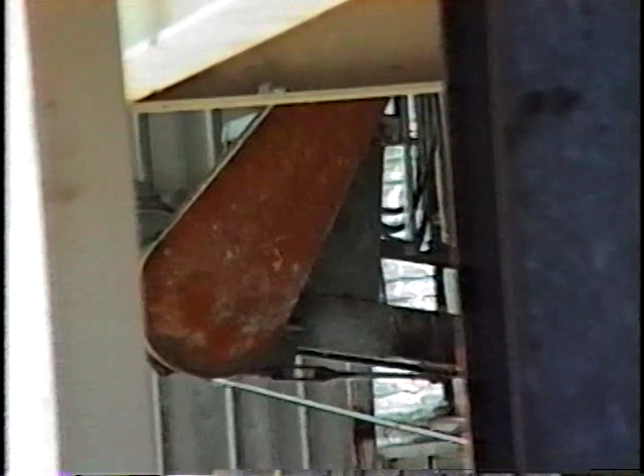This will transport the sludge, which you can see barely in the distance there. That sludge will eventually drop on this conveyor and be transported up by means of this conveyor, across and over, and drop into the JC Steel feeder.

As we look down into the feeder, we can see it is equipped with a live bottom multiple screw arrangement. There are 4 separate individual screws that transport the material across and under the cross screw. This is the JC Steel screw feeder, which will screw the sludge from number 3 conveyor into the Model 360 impact dryer mill.

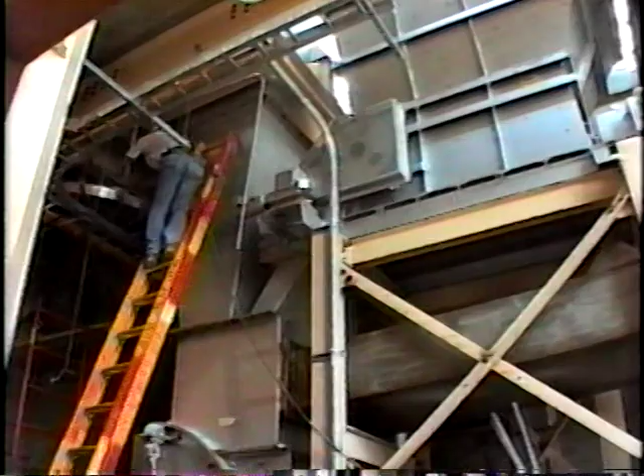This is a 200 horsepower motor that drives this mill with a 4 sheave pulley on here. The hot gases come in right there in the duct where the braces cross, and the sludge comes in on the very top of the mill and mixes with the hot air.

The dried sludge comes out through the back duct and goes up to the cyclone, to the velocity separator. This is the velocity separator right below us from the Model 360 impact dryer mill, which is on the ground floor. The dried sludge and hot air come up through this separator, and the gas come through here and go to the cyclone separator.

Inside this cyclone separator, the dried sludge is separated from the gas. The dried sludge falls to the bottom of this separator and goes through the rotary valve down there on the floor. From the rotary valve, the dried sludge goes to the Meteor dryer mill, gets dried one more time with drying air, and then goes to the sludge combustor.

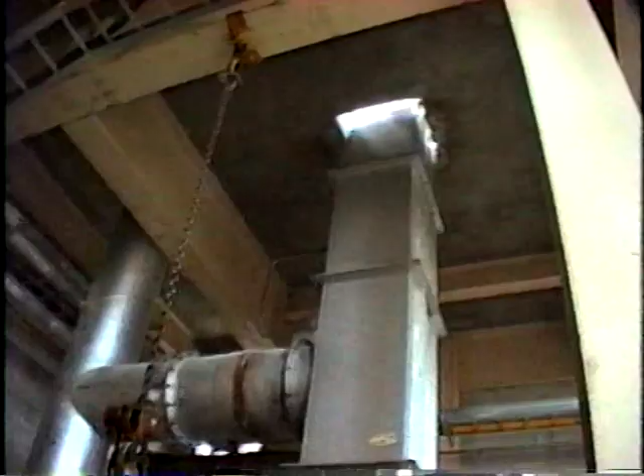This is the downpipe that is directly below the cyclone rotary valve. So the primary sludge that has been ground now drops into this pipe.

The dried sludge from the cyclone separator comes through here and into the Meteor hammer mill. It gets dried again with the drying air that comes in through the line here with the sludge.

This is a bypass in the back. We can either run the air through the sludge to dry it, or we can bypass the air back there around the mill and through this fan, which is over here.

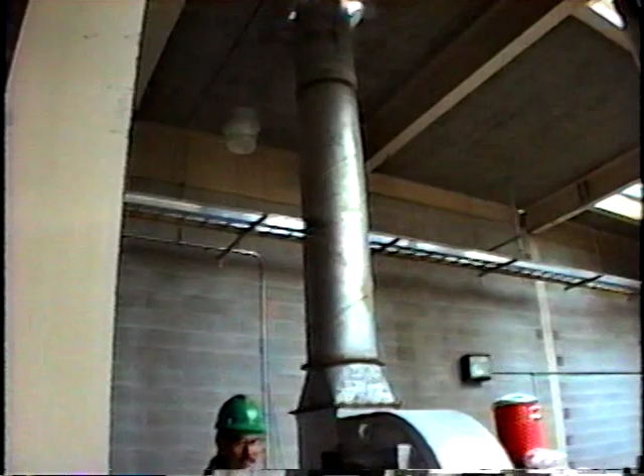This fan is the one that conveys the dried sludge and air up to the sludge combustor, fan evacuating the Meteor mill. So now the air and fuel are transported up this line and enter the Coen burner.

Those are all inputs on that sheet? These are all inputs. Show me where the inputs are in the cabin. Inputs are located on the top rack, inside.

The first input is pulverizer start. The second input is okay to turn on and engage eddy current clutch.

Are those in the same order as shown on that sheet? Correct. They're all labeled here, saying exactly what they are and what they do. How many inputs do you have? We have 14 inputs.

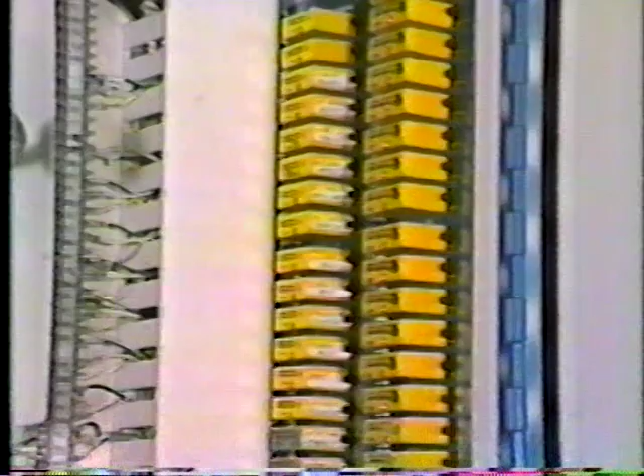Some of these inputs, when they're engaged or off — point to one that's on, please. The first one that is on is spinner over temp. That means we have a normally closed switch coming into this input.

If this light would be off, that would mean we have an over temp indication, which would fire an alarm on the CRT in the main control room.

What's the one above it? The one above it is the ECC cooling system pressure switch, which is a normally closed switch. When we have pressure, the switch opens. If not, we fire an alarm and shut down the entire system.

You would not have any water flow to your clutch.

Sheet 102D9956, page 5 of 11. Okay, we skipped one sheet, is that correct? Correct. That sheet showed the rest of our inputs, the following inputs.

Alright, now what do we got here? This sheet shows some of our outputs. These are our output modules for the computer.

Coming out of the output module on some of the outputs, we have indicators and/or relays, which fire the according output to a motor starter and indicate with an indicator on the local panel.

All of these then are your outputs. Would you please point to your outputs? Our outputs are two lower racks, which are black. Our outputs start with number 1 being on the bottom inside rack.

Those go from 0 to 15, and then 16 through 31 is on the second rack. All of these outputs are fused, a little 5 amp fuse, which is located above each output module.

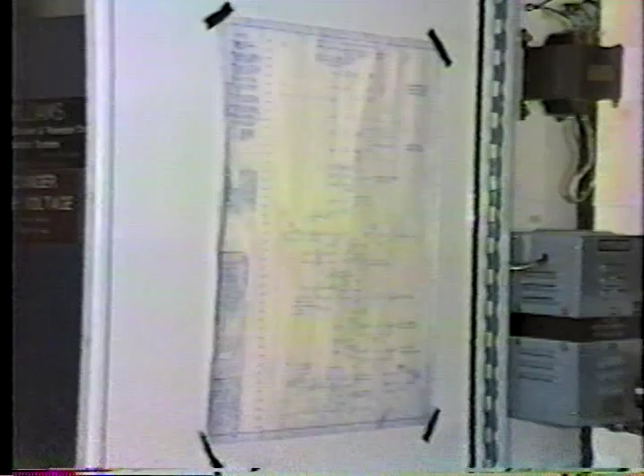This is electrical drawing 102D9956, page 10 of 11. And this drawing covers completely the eddy current clutch drive. Would you please point to that? And the cooling system, which is located on the clutch itself.

Alright, can we discuss in detail some of the functions that are available to us. The first thing we have in the upper left-hand corner says accelerate. What should that be set at? Right now we have it set for 80%.

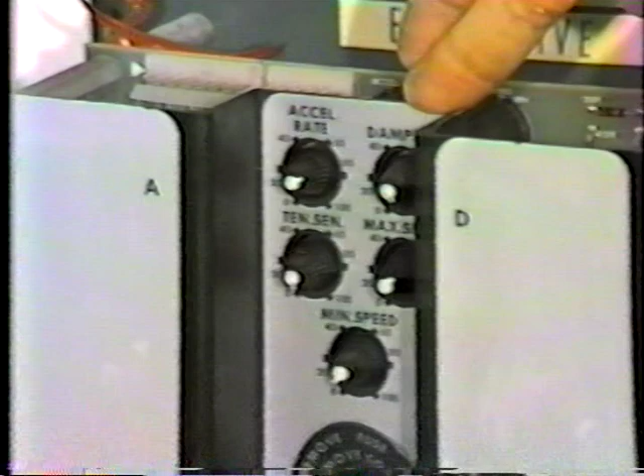What this pot does is give us a ramping feature once we've given it a 4 to 20 milliamp signal of how fast we want this drive to start under load. The next pot, on the top right, is our dampening. This helps to dampen out any fluctuations in current signal coming to the drive. What's it set at? This is set at 100%.

The next one is our tension sensitivity, which on this drive we're not using. We have it set at 0.

The next pot is our max speed for manual. What's that set at? We are set at 80%. You want to change the maximum speed of the drive in manual, this would be the pot you'd have to change.

Does that pot actually override in automatic also? On this drive, no, it does not. It's only manual.

The center pot on the bottom is our minimum speed for manual. For manual setting, that's set at 0 speed, so at minimum speed you would not be rotating. It could actually come down to 0, but you could prevent it from coming to 0 by changing that set point. Correct, only in manual mode.

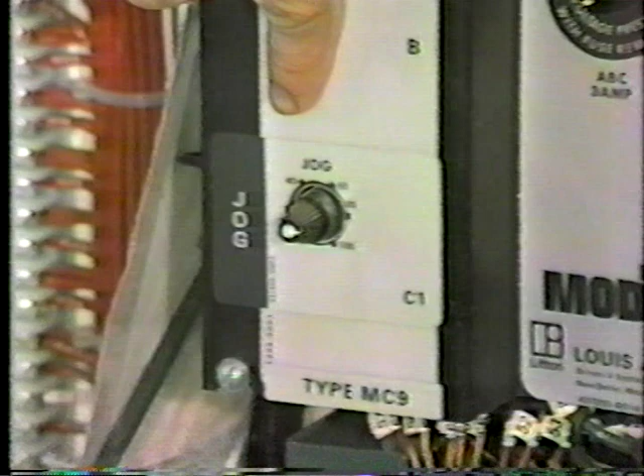Next one would be our jog. We can jog the eddy current clutch 0 to 40% speed of the motor. What's it now set at? We are set at 100%, so we can jog the pulverizer at 40% speed.

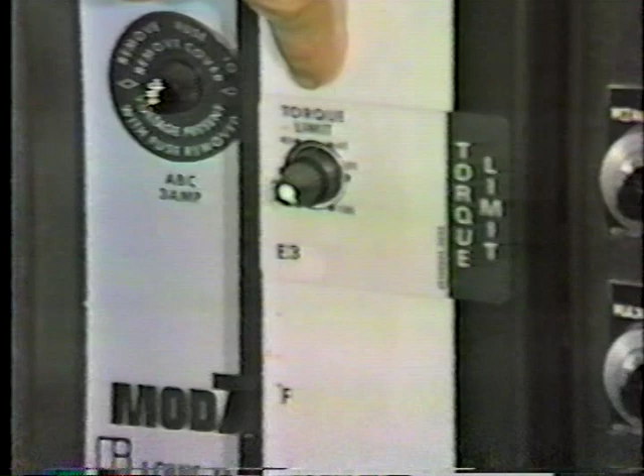We also have a torque limit, which limits the maximum amount of current the pulverizer would handle. It would cause a slipping in the clutch. After we get going, we can set that so in case there's a jam up inside the mill, the torque limiter will allow the mill to slip.

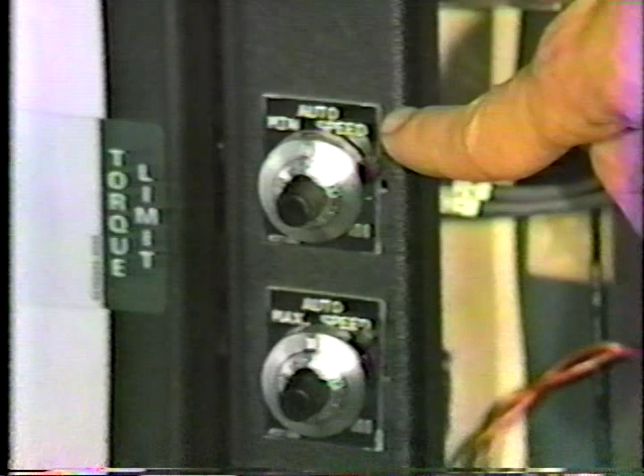Next we have our automatic minimum speed setting. This sets our minimum speed for our current follower circuit on the drive. What's it currently set at? This is set at 0 speed, so you can come all the way down to 0 if you want to, in automatic.

Next one is our automatic maximum speed. That can be set for any value that we want to limit the upper range of the mill in automatic. So that a 20 milliamp signal from the boiler will represent the maximum output that Foster Wheeler wishes for that particular set of burners. That will be adjusted accordingly.

Our bottom pot is a zero bias pot. This helps to stabilize the interaction between the two automatic speed pots. What's it set at right now? It is set at 6.10.

Here we have a Westinghouse 200 horsepower, 1800 RPM motor.

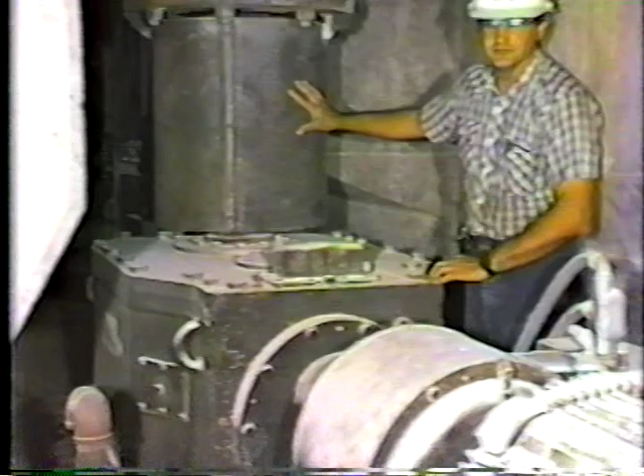This is drawing 102D9956, sheet 11 of 11. This drawing covers in its entirety the spinner classifier drive.

Drawing covers the spinner classifier drive in its entirety, which is a DC drive. Drive is located right here, on this small sub-panel.

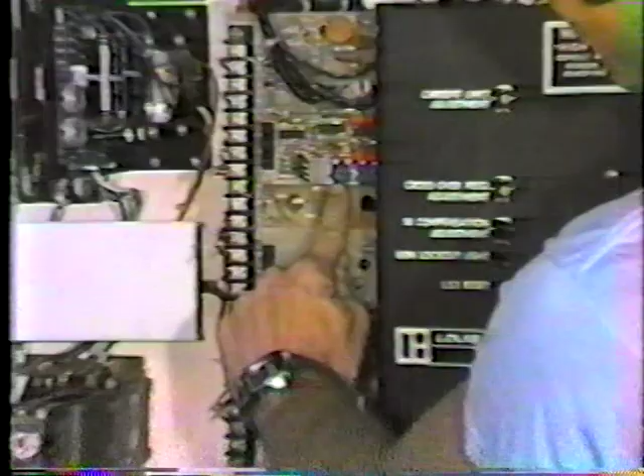To adjust this drive, we have an accel pot, which limits the speed ramp when you give a current signal to the drive on how fast you want the drive to move.

The accel, a decel, sets how fast you want the drive to stop.

Over here we set our jog, which we don't use, do not use. We have a minimum speed pot, which we won't use, we would never use.

Then we have our maximum speed pot, how fast we would want the drive to rotate. That's set maximum.

Stability is similar to your minimum speed in automatic. Response is similar to your maximum speed in automatic.

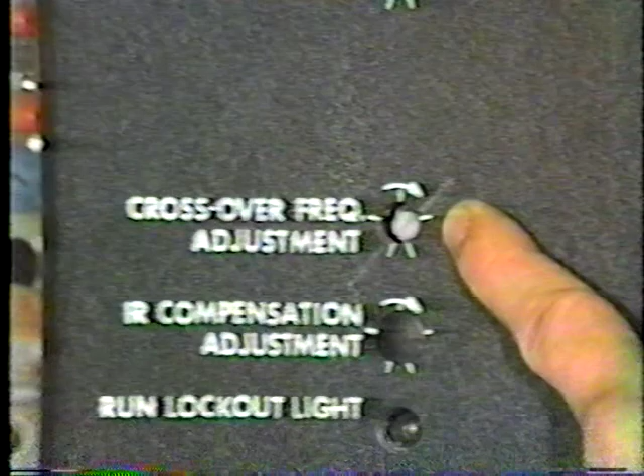This is the crossover frequency adjustment. You adjust the frequency of the drive firing the SCRs. I noticed that's been marked. Yes, it has. This is a factory adjustment.

You then have an IR compensation, which is sealed by the factory. It's not to be fooled with.

If you ever have problems with the drive, you will get a run lockout light that comes on if there's a problem. If you get this light, you need to reset the drive. There's a small reset button you have to press.

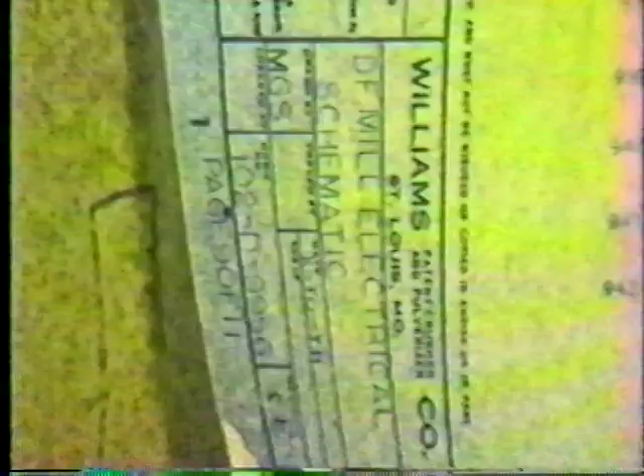This drawing covers all the pulverizer speed meter, spinner speed meter, pulverizer current meter, and spinner current meter. We have our signal conditioners taking a 0 to 40 volt signal converted to a 4 to 20 milliamp signal for the computer to read, for each of the 4 signals.

Supervisors have the key, only the supervisors have the key. They have to go in the manual. Then through these direct pots, you can set the various functions of the machinery.

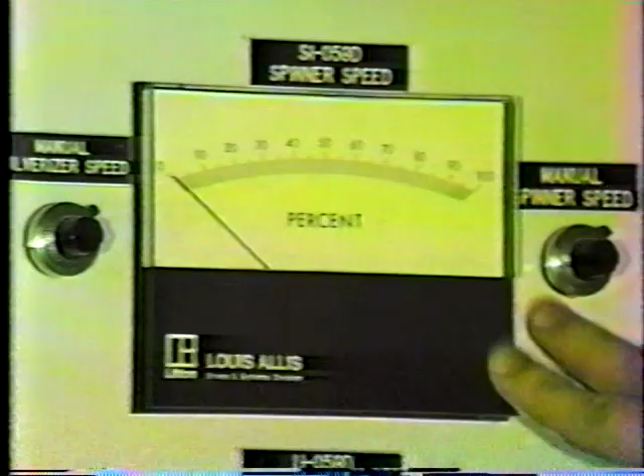We have our spinner speed, which is 0 to 100%, in percent, and the spinner amp, same as the mill. We also have a spinner manual speed pot.

Our differential pressure gauge. This is not in percent. This is actual inches of static pressure across the machine, across the pulverizer.

We have two set points. The lower set point being low DP. That gives an indication that the mill is empty.

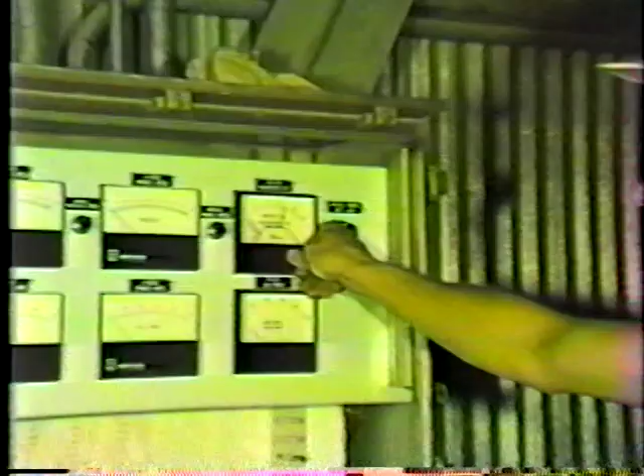The upper set point is a hard limit on feed rate to the mill. For some reason, if the computer starts overfeeding, we can cut the signal to the feeder. So the upper one is an override on the computer and will actually shut off the feeder should something go awry.

The bottom one is our lower hard contact limit telling us that we are empty. Built into the computer circuit is the ability for the computer to tell us that we are 1 inch below our ideal set point. This is another hard contact that we can manually set that will tell us the same thing, and during shutdown they will have notification that we've run out of coal, ground the coal out of the system, and the system can shut down.

The meter below is air CFM in the system, percent air that is flowing through the system. This is a Foster Wheeler feedback, and is only displayed on our board.

We also have a control on-off, power on-off, that is a key switch. Once it's turned off, the only reason it should ever be turned off is if somebody is working on the system. So you've got an on-off power control for this cabinet.

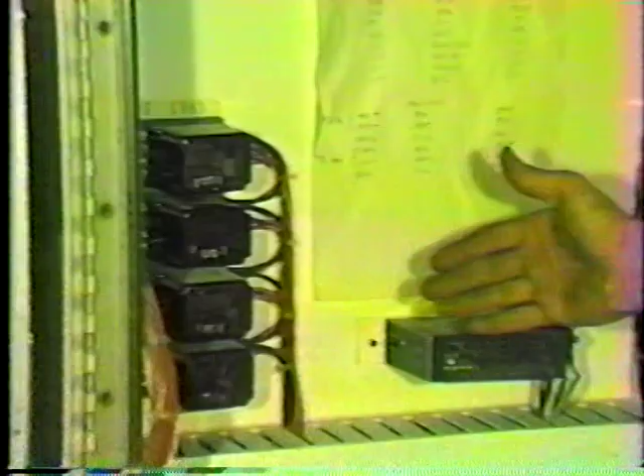These are all our signal conditioning modules, which condition the signals from the meters into the computer. These are the signals that go to the computer.

This power supply feeds the current signal through the Delta P transmitter, power supply for the Delta P transmitter. That's all that's in this cabinet.

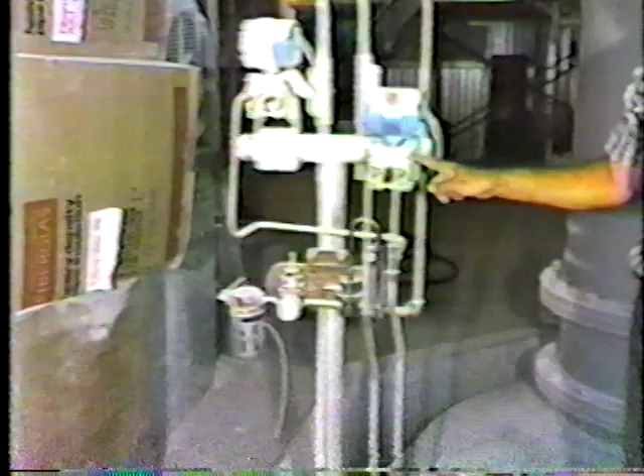This is the lower pressure side. It comes over to the pressure transmitter, which then sends a 4 to 20 milliamp signal to the computer. The computer, based upon mill speed, computes a differential pressure that we should be operating, and in turn generates a signal to the Merrick feeder.

This is a Trabon automatic journal lubrication system. Under normal cycle, we'll have a green light. When the lube makes a cycle and turns on, we will get an amber light. If for any reason the lubrication would not lubricate, we would then get a red bulb light. Okay, open the cabinet door.

Inside of the panel here, we have two means of operating the lube cycle. One, we can press this button here for a manual lube. All right, we'll do that. It will operate the barrel pump. When we press the button, we went from a green light to...

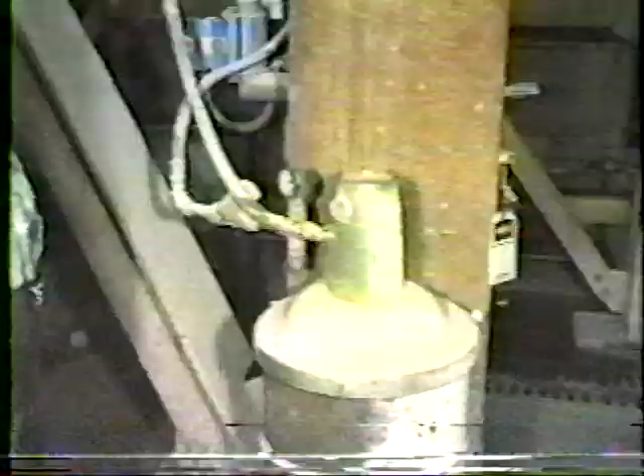This inputs the solenoid to the Trabon barrel pump, which now pumps lubricant out of this barrel. What's in that barrel? It has a lubricant, Mobiltemp 78. That's a high temperature lithium-based grease.

Now that pumps the grease from there, where? It comes out through this fitting, to a high pressure indicator which we're operating at about 1,000 to 1,500 pounds per square inch.

If we get an overpressure in the line, a blockage, rather than rupture a line downstream, we have a rupture disc here that is set to relieve the pressure at about 2,000 psi.

Where's the grease then go? The grease then comes on through this filter, goes out through the line to this distribution block.

Here is the cycle switch. Whenever the lube unit goes through a cycle, it has to make this switch to know that we have completed our lubrication cycle.

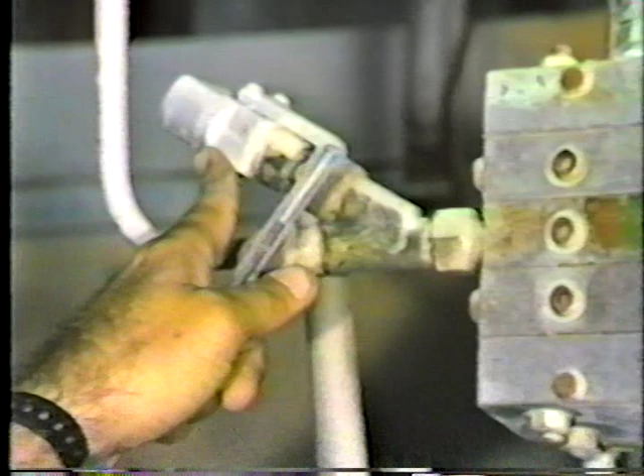It comes down through the block, it splits, and we have one line that goes on through a broken line indicator. What happens there if you've got a broken line? We get an indication, we get a drop in pressure, and an actuation of this switch, knowing that we do not have back pressure on this line, which gives us a fault indicator.

This line goes off to the inside of the pulverizer to lubricate the journals and the top mill bearing. You got another one? This line here goes off and goes to the bottom of the pulverizer and lubricates the bottom mill bearing.

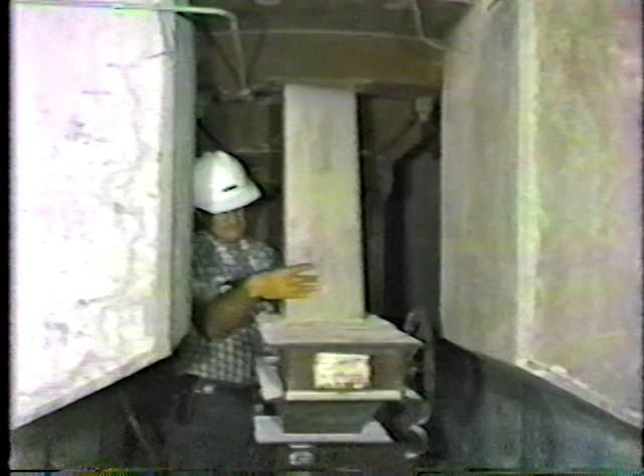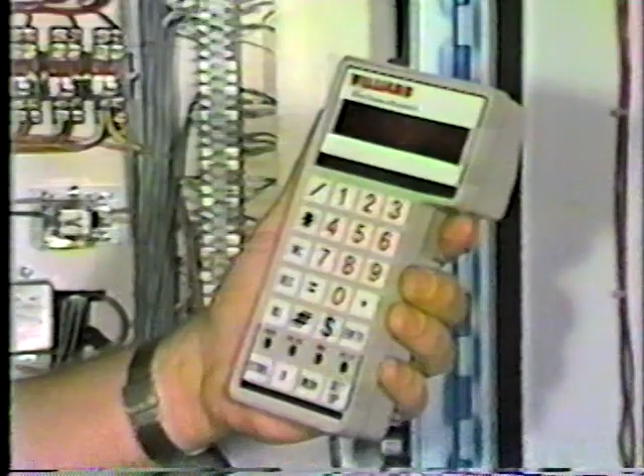Okay, I'm going to zoom down on that. Would you explain a little something about the terminal for us? This is the handheld terminal for entering the parameters which operate the mill. The terminal has an LED display.

Okay, hold on right there. I'm going to turn off the lights so maybe we can see the LED display. Would you hold it up straight at me now? Okay, this is the normal display. Cock it just a little bit, I'm getting a light glare. There it is, what does that say?

It says Williams DF mill. There it is, Williams DF mill. After powering up the computer or resetting the computer, this is the display you will see. You may also notice that after about 3 seconds it blinks. This is part of the self-check of the computer when it turns on.

Could you show me that? All right, the keyboard has a numeric keypad, number 0 and 1 through 9. Several of the keys we don't use, but the very important ones, first of all, the mode of operation. To set up the parameters of the mill, we push setup.

Okay, let's start about what are these setup parameters. There's a double EEPROM that allows you to set variables inside the computer. Is that correct? That is correct. Okay, so now we're going to take a look at the first variable. Is that correct? That's right.

All right, the first variable in the setup, variable number 1, is the minimum operating mill speed. All right, and you can see that it's set for 60% of scale. That can be changed by pushing the increase button or lowered by pushing the decrease button.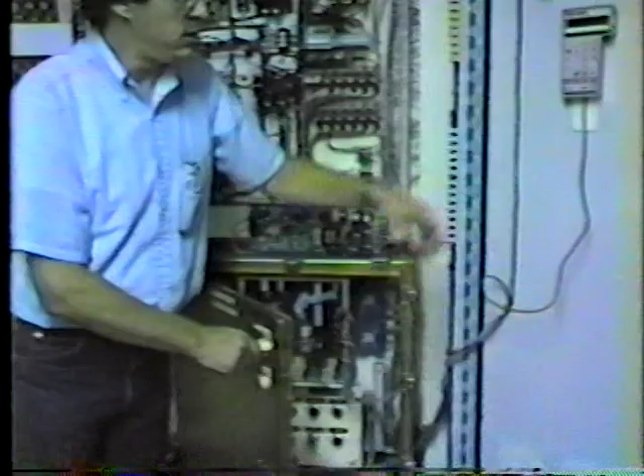The light above the B button should come on, and the mill will not operate. Turn it on, please. Now you can see that we've got the bit failure light. We should also point out that we did not get pulverizer ready to start.

Now you cannot go forward any further, is that correct? That is correct. We have to go to the handheld terminal and see what failed. Would you do built-in test? That is done at location 99.

We have to go to the setup mode. We go to 99, and we see that it's... 102. Show it directly at me, please.

That says that you got a failure at 102. And we look up in the documentation and find out that it's a failure of the analog to digital converter. Okay, having found that and reset the board...

Reset the board, turn the power off first. And we fixed the problem, but even fixing the problem, when we turn the computer power back on, we're still going to get the failure. We've still got the failure up there.

We have to acknowledge to the computer that we have fixed the problem. That will aid in finding intermittents and things of that sort.

So we're going to go to the setup mode, to channel 99, and to clear that number, we could decrease it, but that takes a while, so we hit the B button. Hit the B button to clear it. That sets it back to 0.

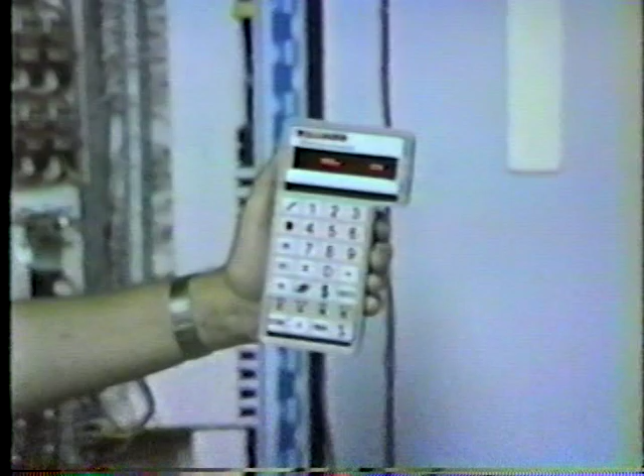Now that's the only way that you can get the pulverizer to start again. You must acknowledge the fact that you had a bit failure in the computer, reset it to 0, and store that value. That is correct.

Are there any other failures like that? Yes, sir. I'll read those off the list to you. Why don't you hold up the list?

Built into the program, when it comes on at power up, it checks the watchdog timer. Show me some of those. The watchdog timer is located on the signal conditioning board.

What does the watchdog timer do? The watchdog timer protects us in case of a computer not failing hard, but going kind of crazy. And if the computer does not, every time through its loop, say 'Hi' to the watchdog timer in about 3 seconds, it will time out and reset the computer, keeping it from going off into space.

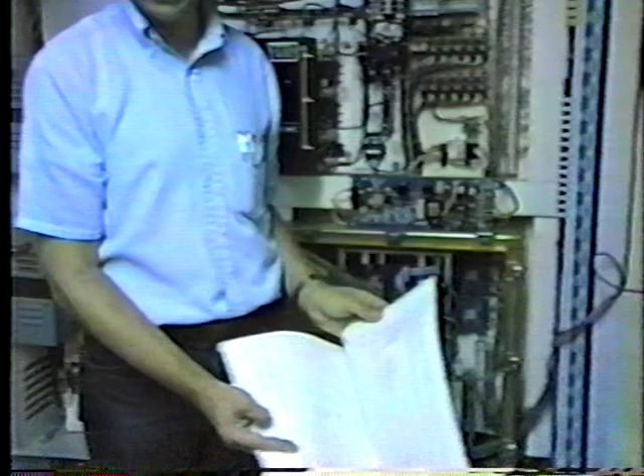That's correct. Besides the watchdog timer, we check the random access memory by writing a pattern out there and reading it back. So in effect, the computer checks itself. If it fails, it's going to notify you how it failed, and you cannot proceed without first clearing the failure. That is correct.

To do that, you have to dial it up under the setup mode, and having done that, clear it by hitting the B button, and then store that information. That's correct. That was the only way you can proceed.

So if this machine ever locks up on you, make sure you come over and look for that bit failure light that's on. That's correct. And if it is, the only way out of it is to acknowledge that failure and reset to 0.

Okay, one other thing, is there a timer on this that would tell you how many hours you've been operational? Yes sir, that's at location 100. Would you show us that? Okay, and right now that shows 0 hours of operation. This would basically tell you how long the machine has been operational.

Every hour, the computer writes to the memory bank, the EEPROM, and updates on the hour, or on any combination of shutdowns it will write directly. Any failure, it will write directly. That is correct, if it's been tripped out by an external trip, and that's normally the Forney flame safety system dropping OK to start or dropping permission to run.

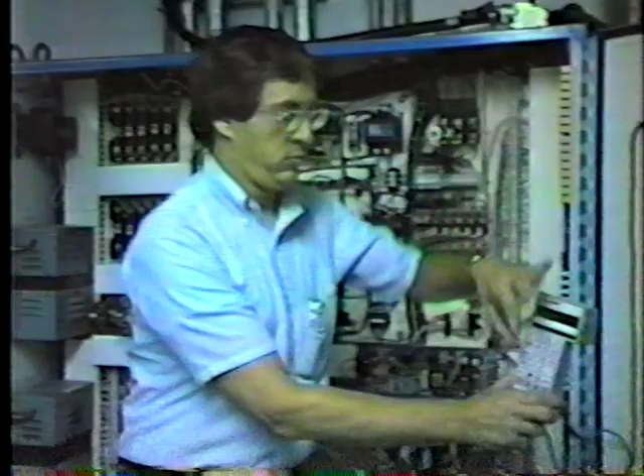Once we've been running, we display on the handheld terminal that we've had an external trip. In other words, you're telling me if, for any reason, we drop off, not due to Williams control, you will notify that there's been an external trip.

That's correct, and that stays until the next trip. So even if we come back up and run, this will stay in the display unless you hit another button of any kind.

Okay, now let's suppose that it's not an external trip and it's a Williams trip. How can you determine what stopped you? Well, if it's been a Williams trip, you'll get the Williams DF mill display again. Okay, give me that. All right, that's the Williams DF mill display.

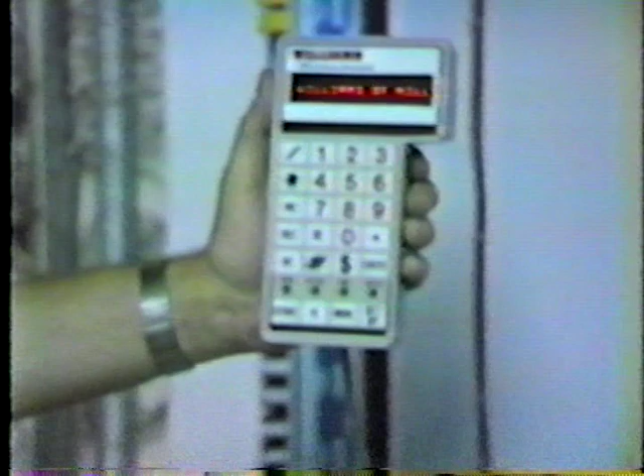That's correct, the unit has tripped. Now how does one go about finding out exactly what tripped it off of the Williams panel? We recognize that Forney will be showing us what tripped, but how could you also see it at the Williams panel? Well, here at the Williams panel, you go over to the output devices, the black solid-state relays, the ones that we looked at before, and they're labeled, and they say things such as spinner start failure, exhauster motor failure.

We have begun a startup, and in 30 seconds we're going to have a failure. What will it be? Should be an exhaust fan failure. Point to it. Right there. And if you look real quickly, that LED actually came on about a half a second before the indication of shutdown started, and shutdown just completed.

Okay, so now that we can walk in here and we can look for the LED that's lighted for a failure on the Williams panel, would you please explain, if we go into the setup mode, would you please push that button? You see the setup light comes on. And now in that mode, would you begin to—I see item number 2, somehow we got up to that.

Would you go back to 1? That's the previously entered item number. Okay, let's go to 1 and enter. Now you see that set for 72.

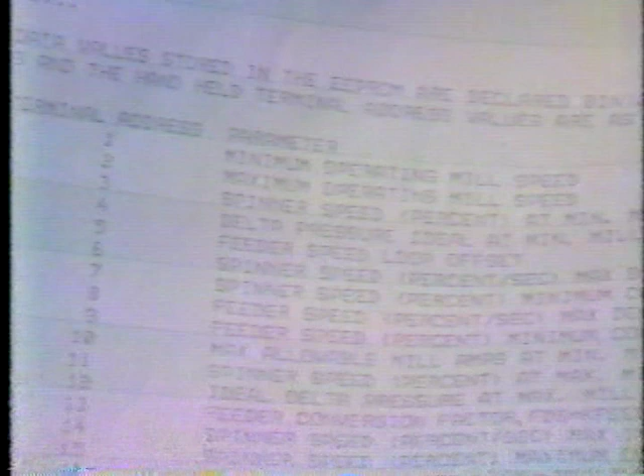Okay, and those values show on there. And item terminal address number 1 says minimum operating mill speed. This is item 2—minimum was first, maximum second. All right, let's take a look at the handheld now.

And so that shows you the value that we set in there, and that's the value that we want to keep in there at all times. The 72% represents the starting position for your roller mill. That's the minimum position, not necessarily the minimum that the roller mill will operate, but the minimum point that we use to reference some of the other parameters we're going to set.

And would you step through that and read off? Now I can step through that merely by pushing setup, and now I'm at number 2, and that, as we indicated, is the maximum operating mill speed, 99%. Okay, and let's stop. We have the terminal in front of us. Item 2 is set at 99.

That's right. Now item 3 is the spinner speed percent at minimum mill speed. Whoops, we got ahead of ourselves. We've done 1 and 2. There's 3. 3 is at 30.

The spinner speed is used to increase or decrease the fineness of the product being burned. Higher percentage gives you finer. So we have set this at 30 and have determined at that setting we get 91 to 92% minus 90 mesh, 200 mesh. The normal is 70 minus 200. So any finer is kind of ridiculous.

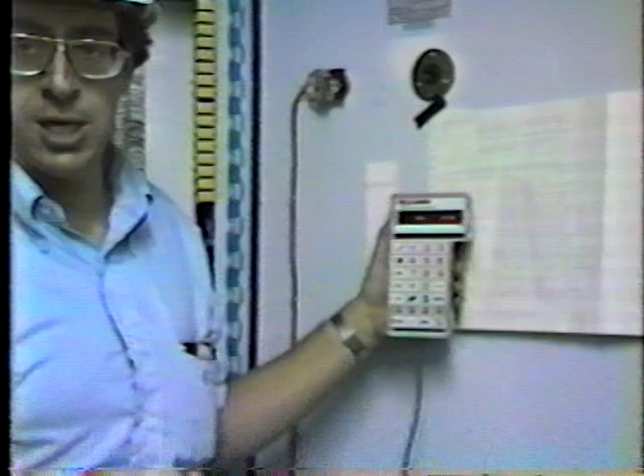Okay, next one. Number 12 is the ideal delta pressure at maximum mill speed. It's set to 67%, which is just a fraction over 2/3 of scale, or 10 inches. That has been set and should not change.

Number 13 is the feeder conversion factor. This is the factor that we calculate boiler demand with, and then we multiply the boiler demand by the linearizing factor of 85%, and that goes out as our feeder command. Okay, that's set at 85. All right, 14.

14 is the spinner speed maximum increase. Up above on number 6, we had the spinner speed maximum decrease. We now have the maximum increase. This is how much we allow the spinner to speed up per second. Okay, that should not be changed, at 5%.

Number 15 is the spinner speed maximum command, and we've allowed for the full range of spinner up to 99%.

Number 16 is the feeder speed maximum increase. This is the amount of topside feeder speed correction that we allow from the target. It's set to 10%.

Number 17 is the feeder speed maximum command. It's set to 99%.

Number 18 is the maximum allowable mill amps at maximum mill speed. We haven't set that, as you noted above, and so that's still set at 99%.

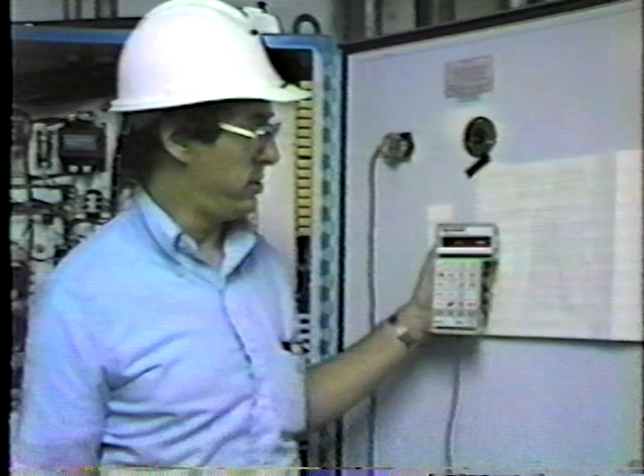Number 21 is the panel alarm timeout value in seconds. This is the time, if you push the DP alarm reset on the local panel out by the pulverizer, that you have to clear up a problem before the alarm will repeat.

22 is the exhaust fan startup delay, set to 30 seconds. This could be reduced if you want to, because apparently your fans are across the line, and it could start in maybe as little as 5 seconds. Allows the program to continue.

23 is the low delta pressure timeout in minutes. This is the time that we will allow the pulverizer to run below, at a certain level below target delta pressure, before we signal the flame safety computer with an alarm.

Correct. Now, there is going to be another factor which indicates that we will not begin counting this time until we're certain delta pressure is below our target. And what number is that? That's number 26. It's called the low delta pressure startup time.

Let's go look at that and then we'll come back. 26 says 30 minutes. We get 30 minutes, and nothing's going to happen for 30 minutes unless somebody does something about the delta pressure being too low.

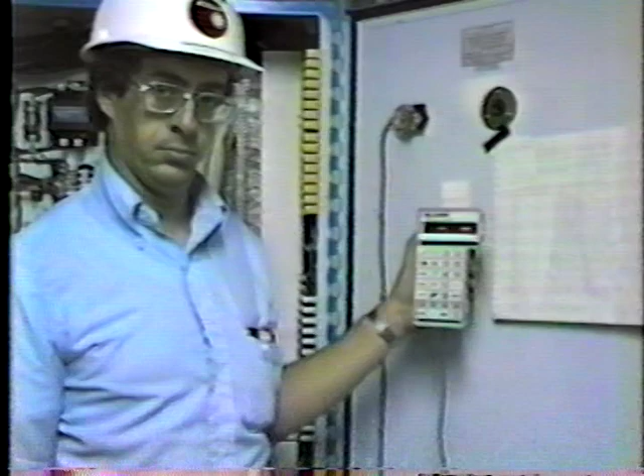Now, that would be an indication if the feeder runs out of material. And that happened today. The material was stuck in the feed chute, clay packed in there, and the low delta pressure shut them down after they ran out of material.

Okay, go back to 24. 24 is the milliamps too high alarm timeout. We had the setting for the milliamps up above. This is the time that we will allow the milliamps to be above that line before we declare the wear alarm.

In either case, we're talking about a non-fatal alarm, it's a warning. So you get 10 minutes? Yes, and this is a debounce type thing. It has to be really proven that it's over.

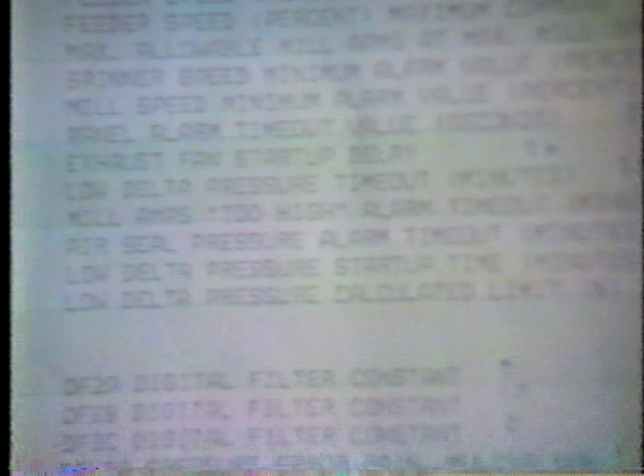25 is the air seal pressure alarm timeout. We allow the air seal pressure to be low for this amount of time, giving a warning alarm before we declare a fatal alarm.

26, we already did, that's the low delta pressure startup time. And 27 is the low delta pressure calculated limit.

Besides having a low delta pressure switch on the delta pressure meter of the local panel, the computer calculates how far delta pressure is running below target delta pressure, and this is the value that it would allow below target. What is that? It shows 0. Shows 80%. I'm going to change that to 20%, because that's where it belongs.

I'm holding the decrease button in and it automatically steps down. When I get to 20, I push store, and that's now locked in the computer. And it should be 20, not 80. That's correct.

All right, now we're down to 27. What's that? Well, we just finished 27. Okay, 28, we don't have anything at 28, and that's signified by the -1. 29, 30, 31, and 32, those are all empty.

They're not currently, I see, 33, 4, 5, 6, 7, and 8. What are those? 33 is 0. Okay, these are digital filtering constants, and they really aren't anything that you should worry about, except we're going to tell you what they are. 33 is 0, 34 is 10, 35 is 0, 36 is what? 1.

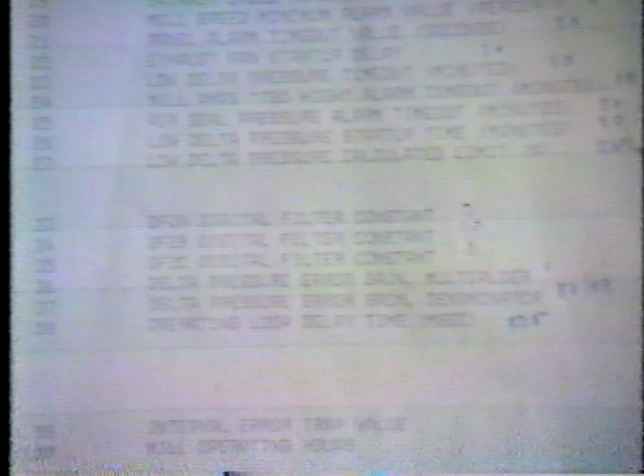37 is 99. And 38, 25. Those are constants that should not be fooled with. Anything else? That's all.

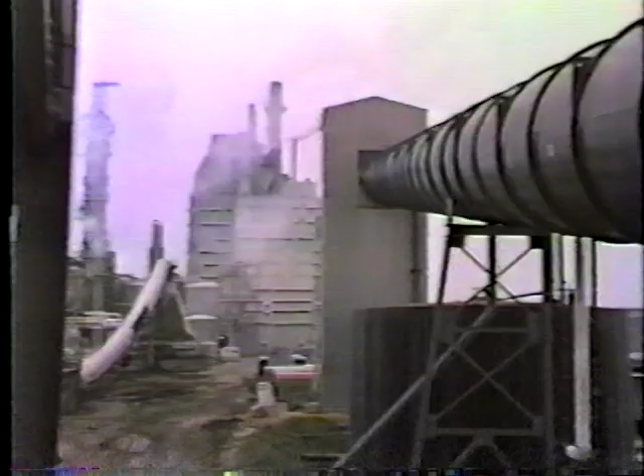There are dual conveyors that bring both coal and shredded bark and wood to the boiler. Bark is in the conveyors to the left and coal to the right.

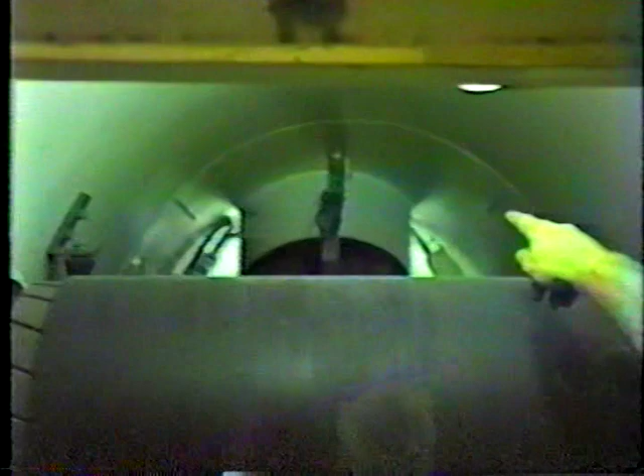By removal of the hinge door on the Merrick feeder, we can see inside. Never do this when the pulverizer is operating. Coal comes down this belt and drops down this chute. There's a plug up, there's a rotary switch there, which will indicate that material's plugged this chute.

Now with the door replaced and bolted tight, the mill is brought up to 92% load, and we can now see the raw coal feed through the viewport. The coal contains 7% moisture and has 13,000 BTUs per pound. The raw coal drops down this stainless steel feed pipe into the pulverizer. Control of the coal feed rate is by the Williams microcomputer, which sets the feeder rate to exactly match the boiler demand signal, coming down into the mill.

Each Williams DF mill is equipped with a tramp metal throwout. By opening this large gate, removal of tramp metal and hard-to-grind materials is accomplished. This is normally done periodically. Hard-to-grind particles such as iron pyrites, slate, and gravel will accumulate at the bottom of the fluid bed and can be dropped out of the system as needed. In addition, should it be necessary to empty the feed chute or mill for any reason, opening the gate and jogging the mill will do the job.

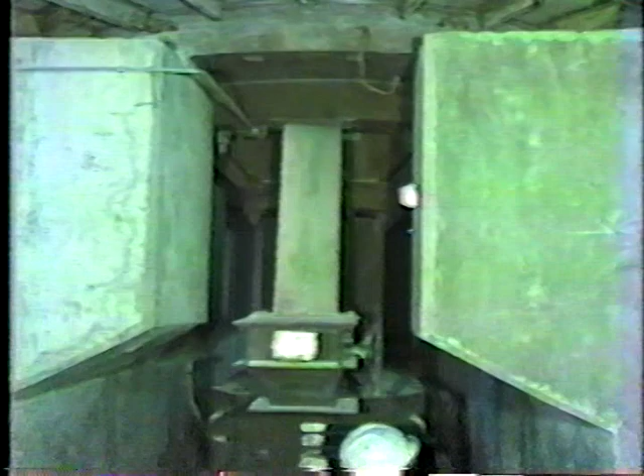The Williams patented DF pulverizer is manufactured in capacities ranging from 1 to 23 tons per hour of coal. The mill's drive skid assembly, shown here, is skid mounted for ease of removal, with a 200 horsepower motor.

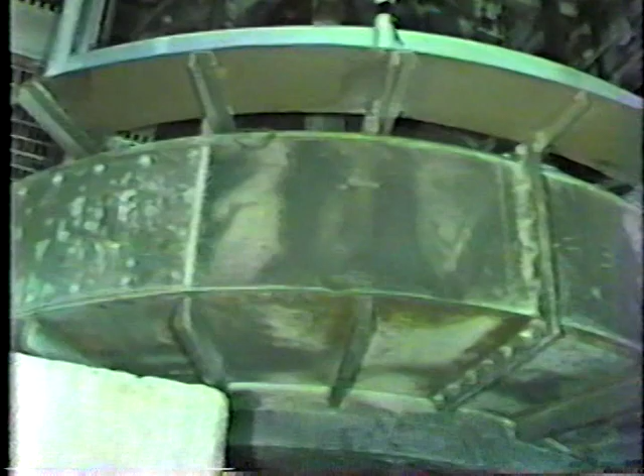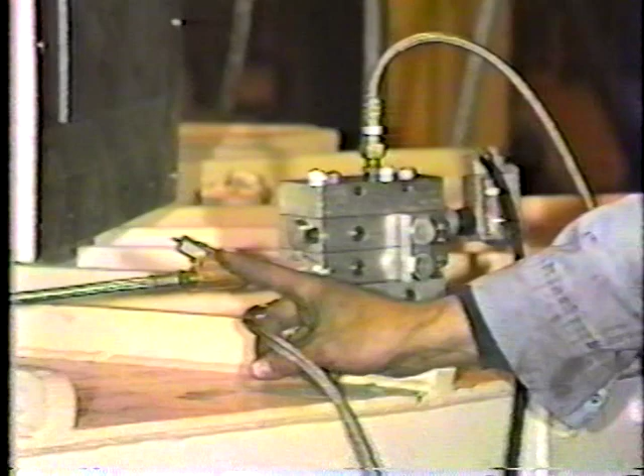The mill lubrication system has several checks, the first of which is the broken line indicator. And what you are pointing to is what is known as the broken line indicator. Is that correct? All right, and point to the switch to your right, which is what we are using to indicate that a cycle is complete.

For purposes of this movie, we're going to deliberately go in and break one of the lines. Okay, so now we're breaking. That's it, hold it right where you got it. Broken line. And as that grease comes out, would somebody point at the broken line indicator? All right, that indicator has now gone in.

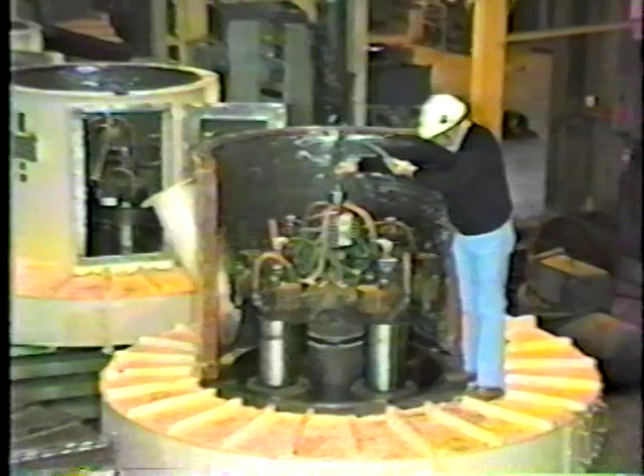All right, indicate now the grease goes down the hole. Grease goes down into the hole, out into the block, through that line.

All lubrication points inside the pulverizer are lubricated from one common distribution block. All lines are high-pressure steel hose, covered with green abrasion-resistant sleeves. The journals are free to roll over uncrushables and pivot back out of the way. There are no springs or spring controls. No, the journal itself. It's rubbing against the bull ring? Yeah.

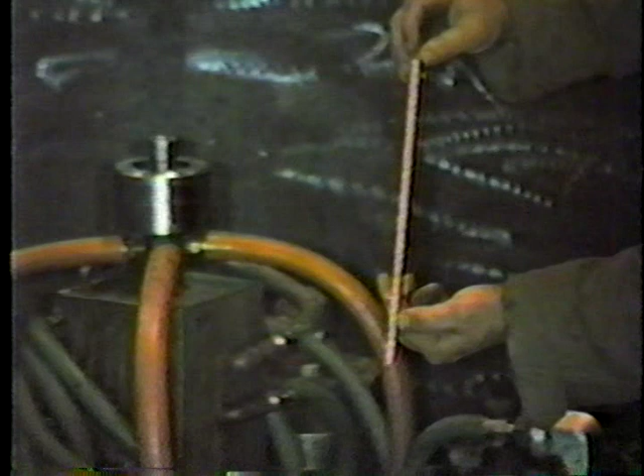Unscrew the oil check plug. All right, and with the dipstick, would you please check the oil level. That dipstick is kept on the inside of the cover, and there's a notch on the dipstick. Is that what you're showing me? Yes. Right, and that shows the level the oil should be at.

Capacity adjustment is achieved from 100% to 0% output by varying the central rotational speed. Since centrifugal force varies as the square of the rotational speed, production will increase or decrease accordingly.

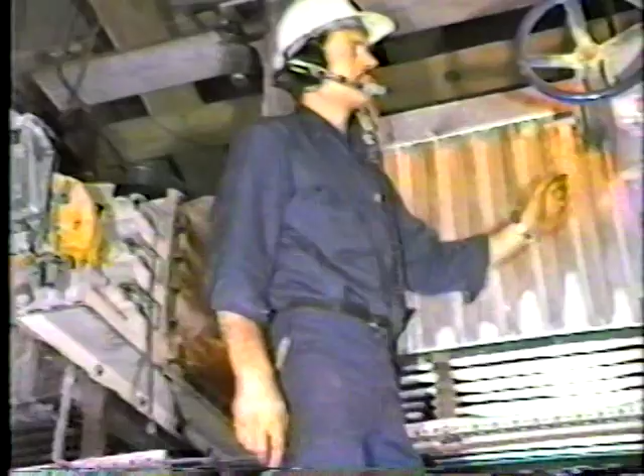Air is used to dry and convey the pulverized coal. Shown to the left is the hot air damper. Central is the positive air shutoff damper used to isolate the system from the boiler. This is called the PASO valve. And to the right is the fresh air tempering damper used to control the mill outlet temperature to 150 degrees Fahrenheit.

The hot gases are conveyed to circular bustles, which we call wind boxes. These wind boxes surround each pulverizer, and they introduce air equally around the periphery so as to fluidize the coal and dry it, and convey it up to the active classifier we call a spinner separator. Because of the active classifier design, sieve analysis for the pulverized coal remains constantly at 90% through 200 mesh. At high or low loads, there is 0% 50 mesh oversize. Pulverized coal and air rise into the separator, where spinning blades force the heavier particles back down for regrinding at the mill zone.

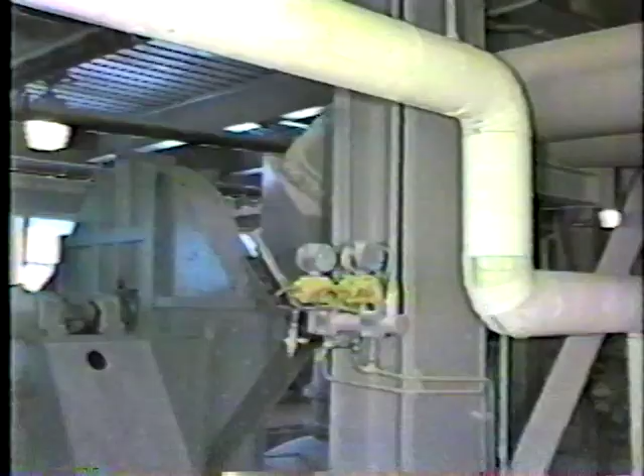From the splitter valve, 2 pipe runs are used to transport the pulverized coal to each burner. Each pipe run has a coal flow cutoff valve, which is driven by an air cylinder. These valves are always closed when the pulverizer is shut down.

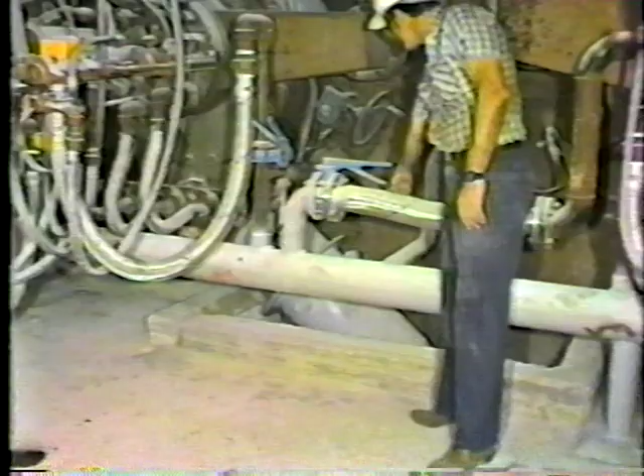This Foster Wheeler burner is equipped for coal, number 6 oil, and gas fuels, reducing the turbulence in the inner annular region nearest the fuel, while directing the major portion of the air to the outer annulus lowers the flame temperature and NOx.